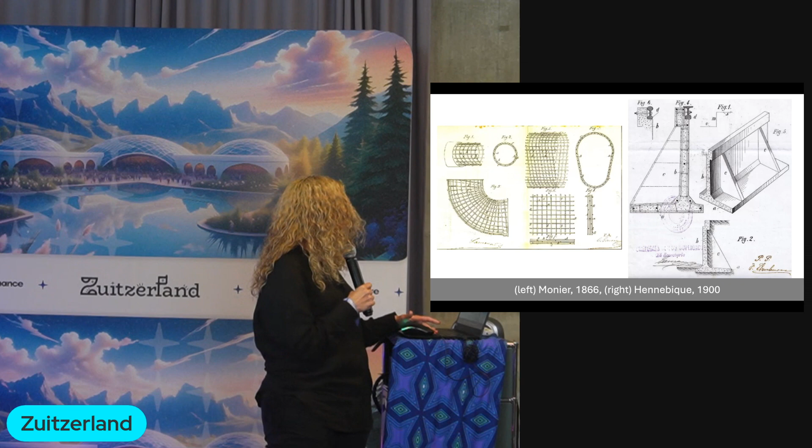And something very interesting for me as we work through this is when we find that the ways that we build right now in 2025 are based on patents that are coming from the 1900s. For example, reinforcement bars for concrete; this patent was filed in 1866. Or if we look at CLT, mass timber, all of what we talk about these days about timber, we can go to the 1920s when this was invented. So the idea of Circular Factory and what we're pursuing is: what will be the modern version of this? How will this look, and how can we make this more accessible, more customized, and more distributed?

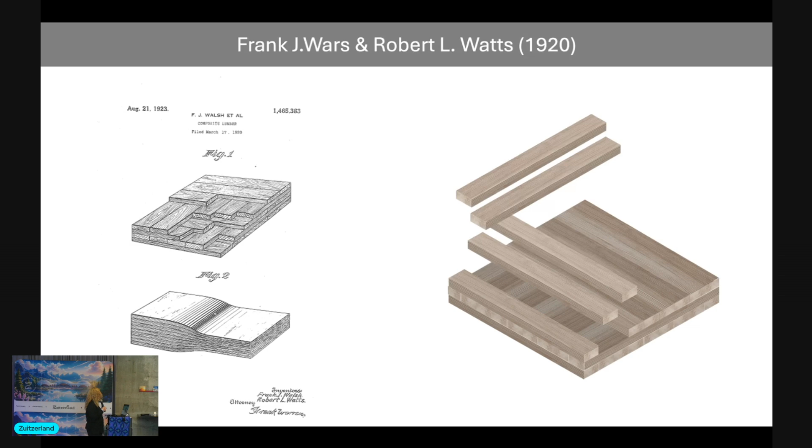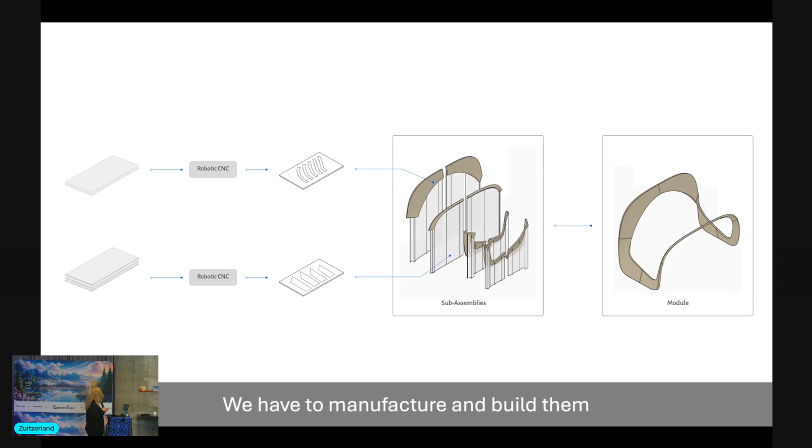And of course, we know that AI can give us a lot of good ideas. We love generating stuff with AI. However, at the end of the day, to be part of the built environment, we do have to build all of these structures and all of these geometries. So how do we manufacture and build these ideas, when we talk to groups and people who are really fascinated by forms and shapes that they don't normally see in the built environment? And how can we make this accessible, affordable, efficient, and also participatory for everyone involved? Those are the tenets of what we have been working on.

Why we use robots, and why we have been shaping Circular Factory on robots, is because they are really accessible machines. They are very cheap compared to other larger fabrication machines in the industry for traditional orthogonal construction, panelized construction, or mass timber. So we focus a lot on robotic arms. We know that there has been a lot of work since the early 2000s with Gramazio Kohler at the ETH and a lot of other universities and institutions really looking at robotic fabrication as an alternative.

And the other thing is that we know that the machines are very flexible. So whatever you can hold in your hand, whatever tool you can have, a robot arm can also hold in its hand. They can use the same chainsaw, bandsaw, gripper, pencil, marker, whatever you can think of.

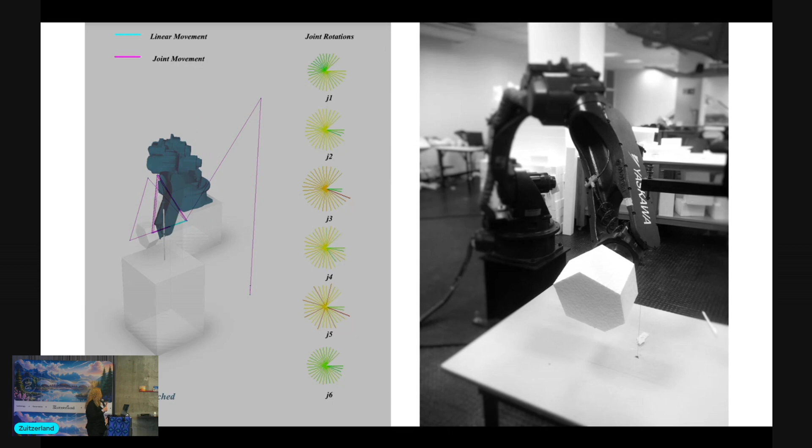And we kind of started to play with this and to see, okay, what are the different kinematics, the different solvers, the different ways that we need to program robotics, but also how can we build geometries that have a different language, but that also is reflective of how the robot works as opposed to how the human works. And also, how can these geometries be built in an efficient way?

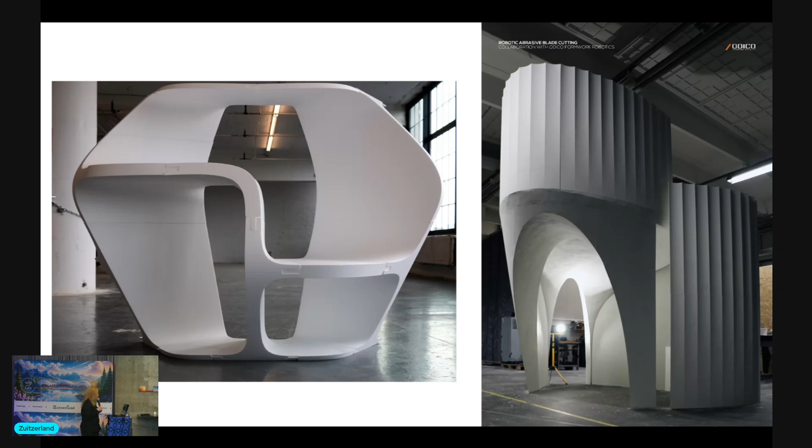So these are some experiments that we did at the DRL, at the AA, on a master studio I was leading with Shajay for 5 years, where really all the ornamentation is coming from the robot arm. And also, how can we mix a lot of these methods of construction with traditional methods of construction? So not making everything new, but also taking expertise from things that are very well established, that people know how to do, that people are comfortable doing, and just bringing that layer of innovation on top to make a difference. So that's the kind of things that really interest us.

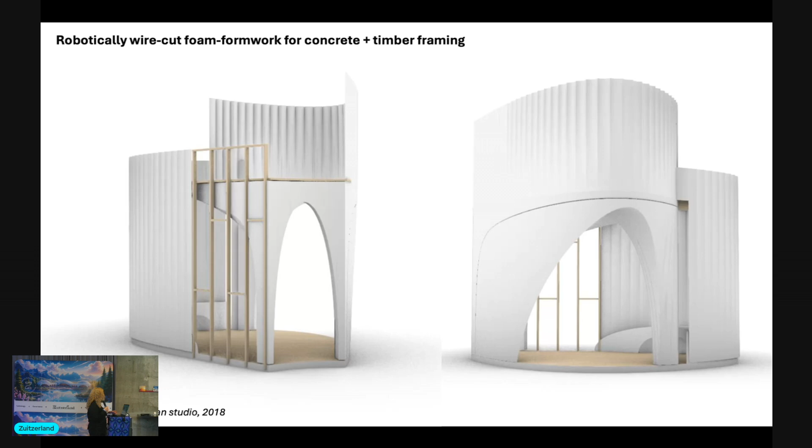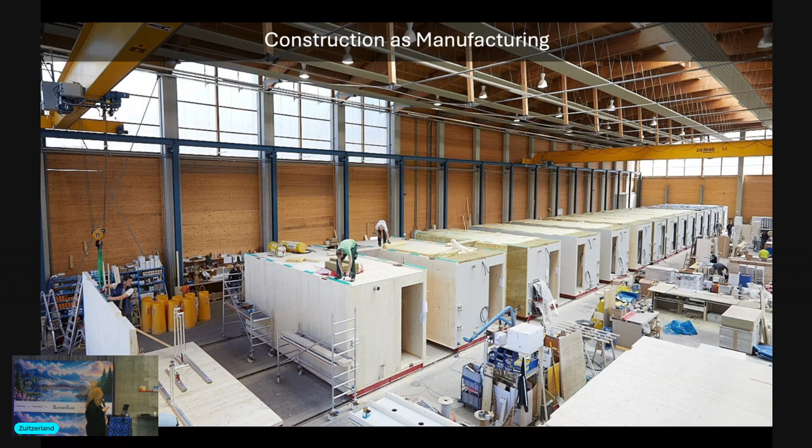And something that we know is design for manufacturing and assembly, the main precept of the industry, DFMA, came in the 1980s, when a lot of the on-site construction, a lot of the fabrication basically got moved into factories, into shops, and a lot of the built environment we see around us today is made of construction seen as manufacturing, which basically means that houses and buildings are produced off-site in a remote location in factories, and are then transported to the site where they are going to be deployed.

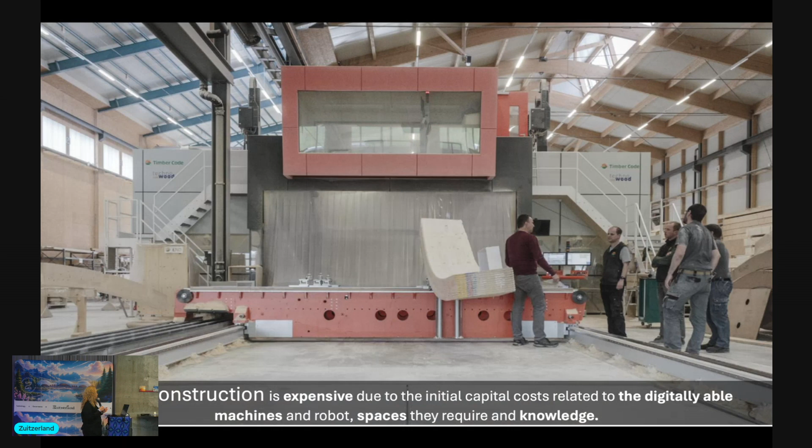What that means on the one hand is that we have a lot of repetition, a lot of standardization, as opposed to normal housing where you have your own personality or individuality. It also means that it is in the hands of very centralized and very few companies that can afford these very expensive machines, the larger spaces where these machines are positioned, and also the knowledge to operate these machines. So what we are trying to do is reduce the initial cost to use the machines, and also the knowledge and the learning curve, to enable more people to participate in this digital space of fabrication.

And also a lot of the work, especially as we will see with Prospera, but with cities, is how can we also get engaged with the small and medium companies that are around 98% of the contracting firms in the construction industry, as opposed to having it centralized in only big offices and big construction companies. So from DFMA, a concept from the 1980s, we are trying to move to this new precept of what we call design for robofacturing, DFR, which is flexible robotic cells that can robofacture high quality products using a single arm machine, simple machines that are cheaper and easier to use. So what we call human compatible digital fabrication.

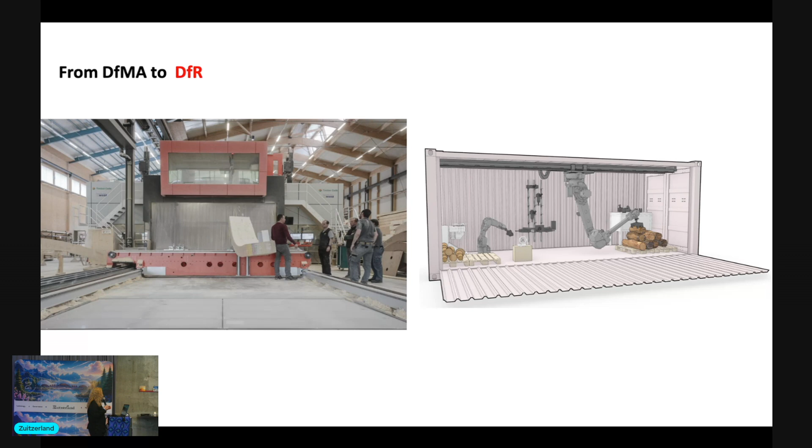So how can we move from a concept of design for manufacturing and assembly towards a concept of design for robofacturing? And some of the things are, okay, how can we move from these large, centralized machines to distributed microfactories that can be placed in remote locations, all over the world, and that are based on machines that are more flexible and more affordable. So this is what we're trying to do.

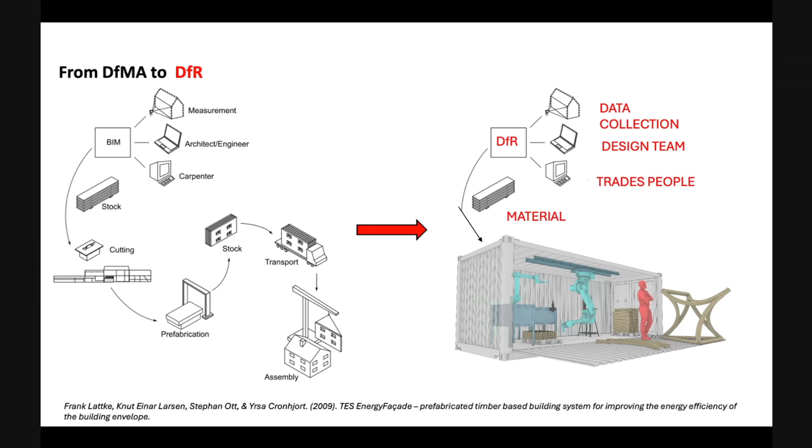And also, how can we get closer to the tradespeople, closer to the design team, closer to the developer, closer to the investors, in a way that all of these different trades and participants are engaged together within the same digital platform, and they can have transparency and visibility of the whole fabrication process. It's not only that you receive an invoice, receive an estimation, and then you have to pay that, but how can we make this very transparent to everyone involved?

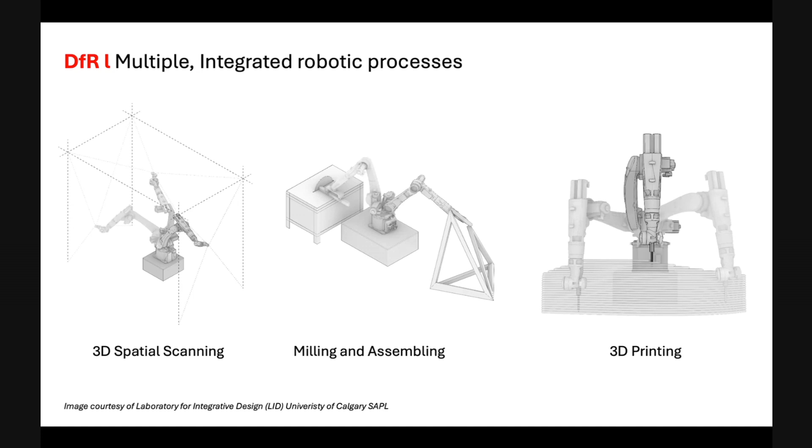And again, we use the robot for spatial scanning, milling, assembly, 3D printing. So we have a lot of different processes embedded in our machines in the microfactory. Pick and place, 3D printing. So these are some of the tools that we also use.

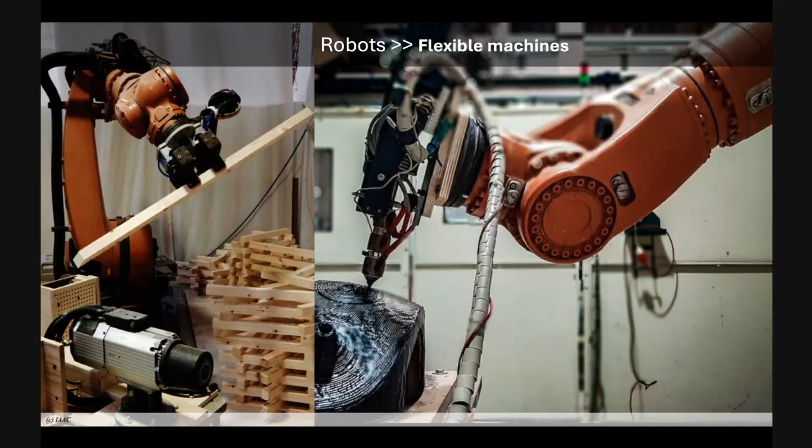And of course, something that we are also starting to see now after 2 years of operation is how it can start to benefit the local economy. Because as opposed to factory-made construction, all the materials that we source are local, in the case of Prospera from Honduras, but also all the local people, all the local trades that we are using, training and upskilling, are local to the community where the microfactory is based. So that is a very critical part of what we want to do.

And there are also additional or periphery industries that benefit. For example, we have a person that has a kitchen cooking for the workers. So construction really starts to bring benefits to a bigger ecosystem than what we expected.

And that has been something very interesting for us to see, how we now have additional industries serving our factory. Something that we are also looking at and are very engaged with is cyber-physical platforms. I think Shaya mentioned Jane Jacobs, and how the point of cities is to have this multiplicity of choice. So how can we engage the user, the buyer, in the decisions of the design that is being fabricated? So it's not only the architect and the designer, but people can also have a choice.

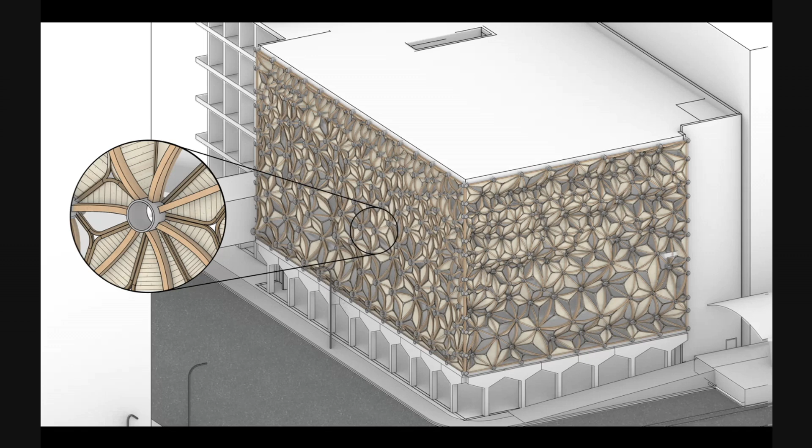And we have developed a platform. For example, this is a facade in Canada that we were designing where there are multiple options, everything is differentiated. It's a conversion from an office building into residential, so these used to be offices, now they are flats. In your flat you can decide what view you have, the facade, the transparency, the different opaqueness of the panels, so you can make many decisions. Whether you want more solar gains or less, but how can people actually understand this and be part of the design? So for that, we developed a game.

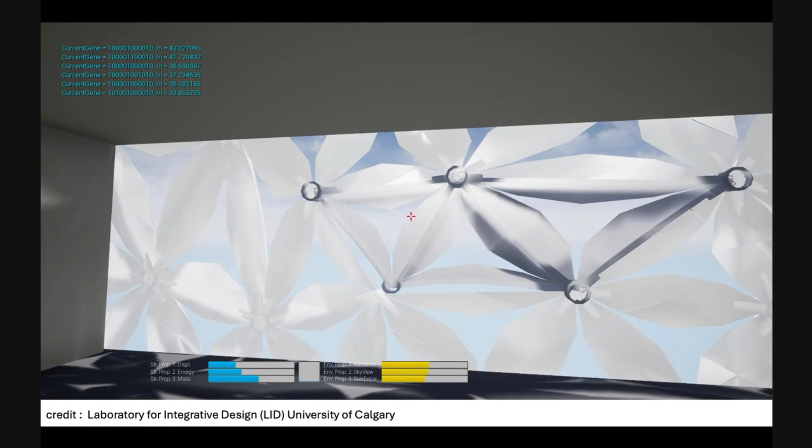It's in Unreal, where we are trying to give people feedback, so as they are selecting and choosing, we tell them: that will take more manufacturing time, more robotic time, that will have more thermal gains, what your thermal comfort is, but also solar gains, what your view is. The idea is to make a lot of these parameters accessible for a common user. So we grouped these into terms that make sense, like radiation, sky view, fabrication, and people can be selecting and moving, a little bit like when you go to a supermarket, you buy food, you can see the calories, carbs, proteins, etc.

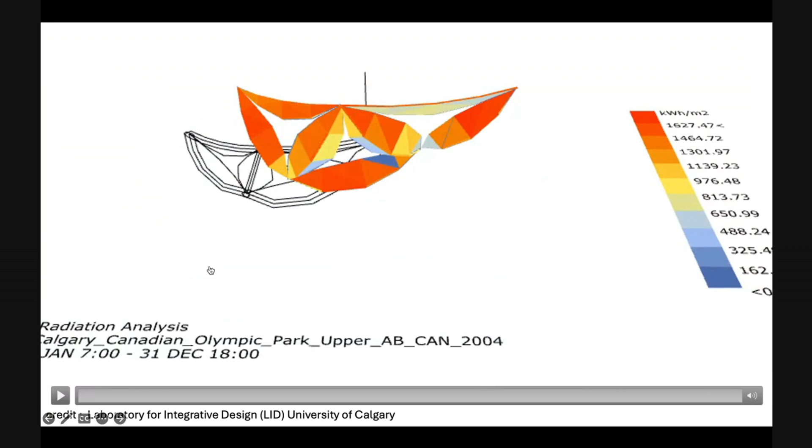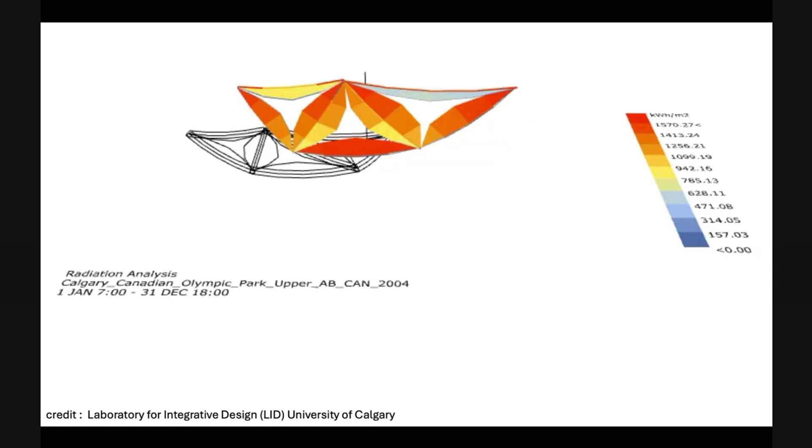Can you see the manufacturing time, the machine time, the electricity consumption that every single decision you make on the built environment has? And does that actually help you make decisions, or do people not really care at all? So that's part of the work we have been doing. Of course, in the background of the platform, we are running all of the simulations, for example thermal analysis. People don't see this, but also what is acceptable for construction, what is acceptable for the deformation of the curvature of the different glue laminations for the facade.

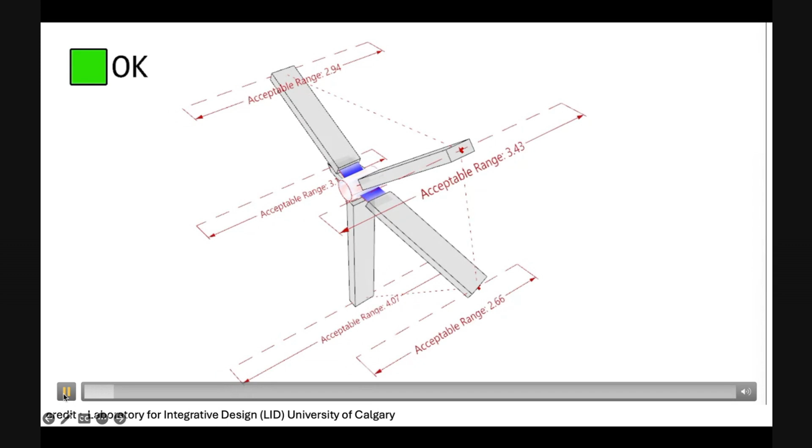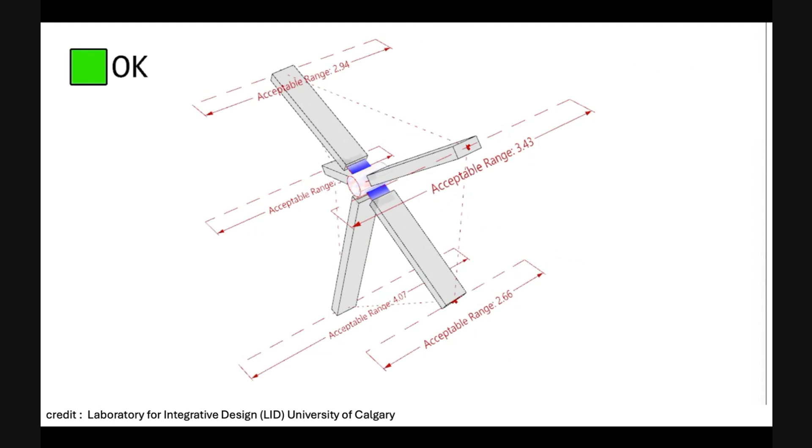So people are only allowed to pick between things that we know can be made, although they will have different costs and different implications. So within what is acceptable, they have an option to decide. This is ongoing research that we have been testing with expert users, like designers, and non-expert users, like developers, clients, or just people that will inhabit the building, giving them all of these options as feedback information for their decisions. And of course, when the whole aggregation comes, this starts to show what will happen there. So yeah, maybe this is not working.

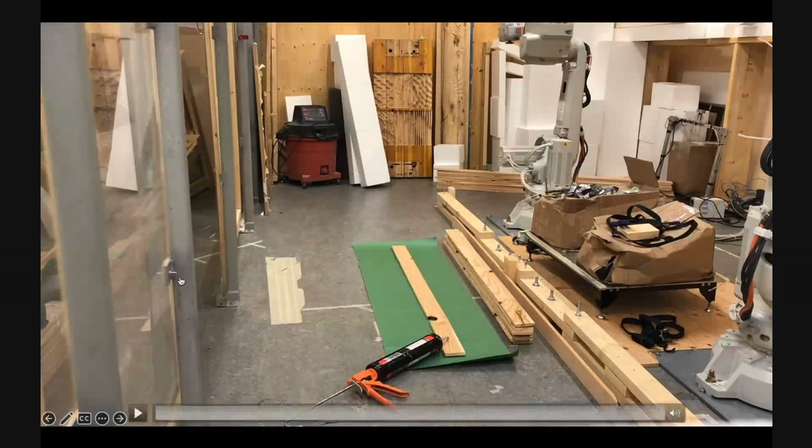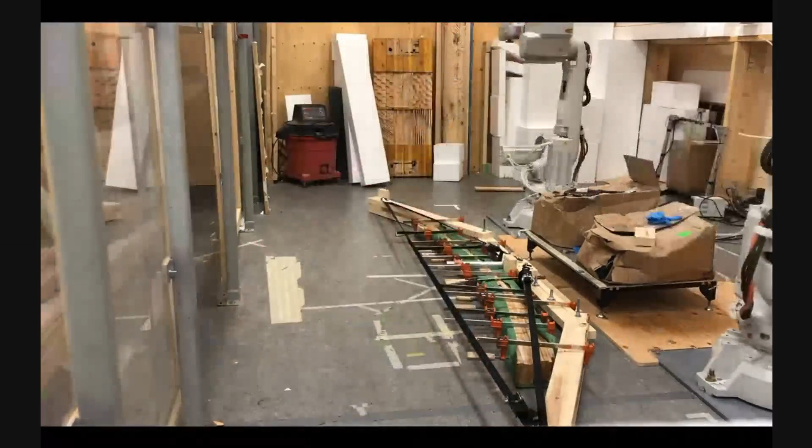And all of this data is also based on fabrication. At the same time we are using the robots, the fabrication system, to know what is the maximum deflection, what is allowed, what is not allowed, how long the robot takes to do it. Our robots are also running on generators, so we know the electricity consumption. So we are trying to capture as much data of every single step as possible, so that you can know exactly how much machine time, but also electricity consumption, your decision could have on how the components are produced.

And the robots are the same machine again, so it bends, it's also milling, it's also doing all of the mitering, all of the cutting. So a single machine with multiple processes embedded at the same time, trying to make them as flexible and customizable as possible for all of the different requirements that the clients, the developers, or the people using these buildings might have.

There's something funny.

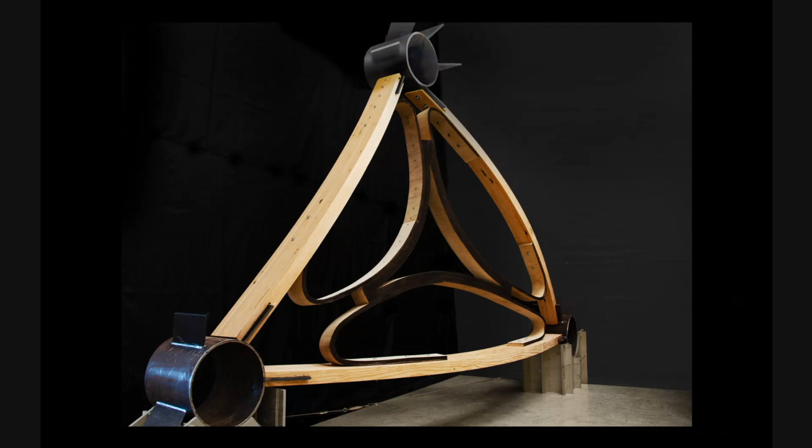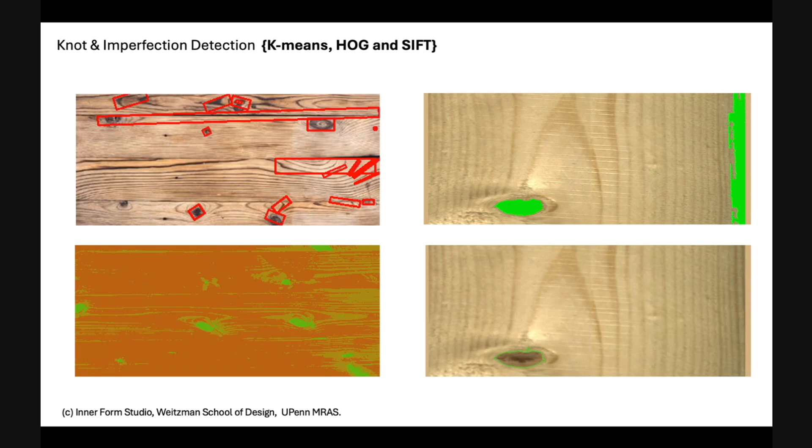And then this is, for example, one of the full-scale prototypes that we are building, another thing that we have built based on user decisions and feedback. And something that we are also using in the shop is machine learning as a way of understanding materials that are heterogeneous, like wood, for example timber, that has a lot of different characteristics, a lot of different natural processes, like knots and grain directions. So how can we detect all of these before we do our laminations, so we can have a more efficient use of the material?

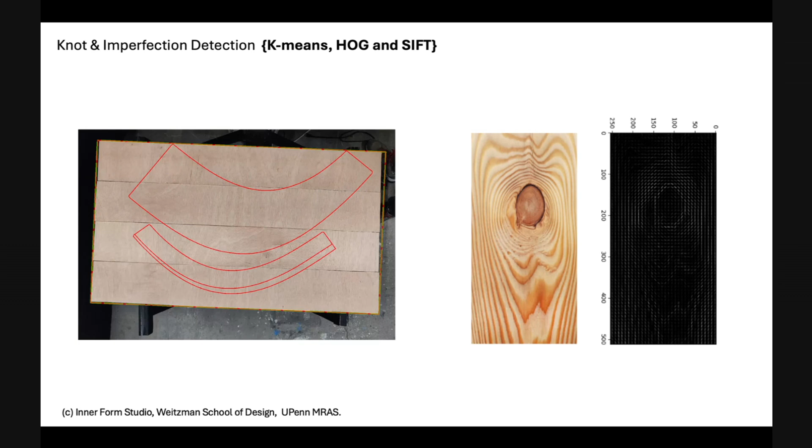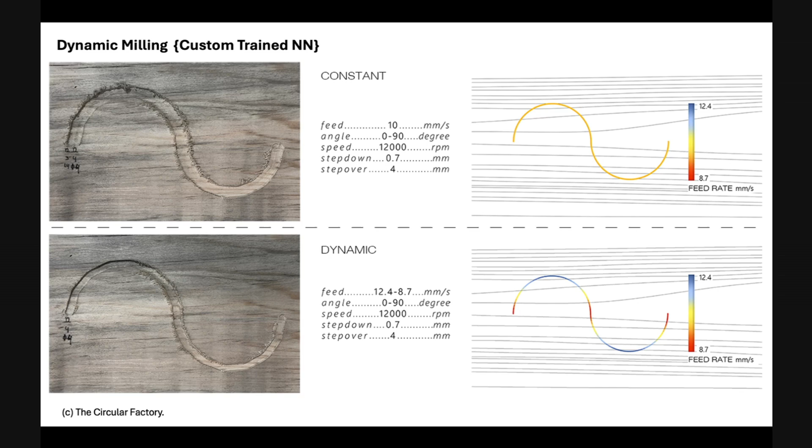And our workers at the shop, although they don't know any of this, when they are laying out the laminations, the pieces, they can get visual feedback of where to place them and how to place them, to avoid any imperfections or to make the process more efficient. So this is also something that we implement. And also dynamic milling: how can we change our speeds and feeds to get the best results as we go. So a lot of these are the inner workings of the platform and the research that we are doing to incorporate into the platform before doing the circular factory, and what we are offering as part of our cyber-physical platform.

And a lot of different wood also. So we also work on how you can have different combinations of wood, especially in a place like Honduras. They have timber, which is pine, the more normal construction material, but they also have walnut and mahogany, very precious woods. So can we have hybrids where we have the precious woods on the outside for water resistance, to make them less affected by termites and bugs, but keep the core lightweight? So we are also looking at a lot of these hybrid compositions to make the best use of the material available. They also have a lot of teak, a lot of really expensive and really nice wood, and we are really trying to make and promote these compositions.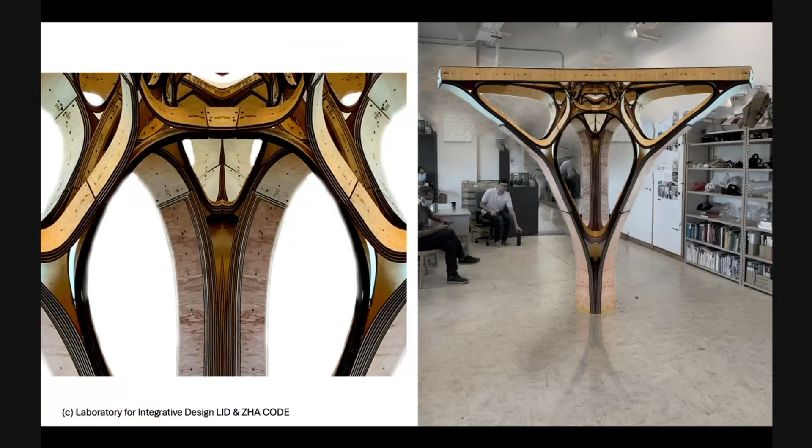And also the expression of the construction. So again, in this case with the laminations, if we have a lot of laminations, how can we make that very expressive in the final product? So we are trying to combine all of these into a single offering.

And also, as I mentioned before, we engage with local materials, and this is something that we try to do because we're upskilling people. We are really working on reskilling, on building local knowledge, and also on making people proud of what they are doing. And that's something very important when we engage with communities. When we arrive in a community, we want to become part of that community. It's a new city, but we need to use the local labor. We want them to get excited and to get better opportunities as they move on in life.

And one of the things is that it's different from Swiss wood. Wood from Honduras is not perfect. It's not really precise, right? It has a lot of imperfections. So we really need a very adaptable platform to deal with all of the twists, the crookedness, and all of the issues with the wood. So we really try to work toward that.

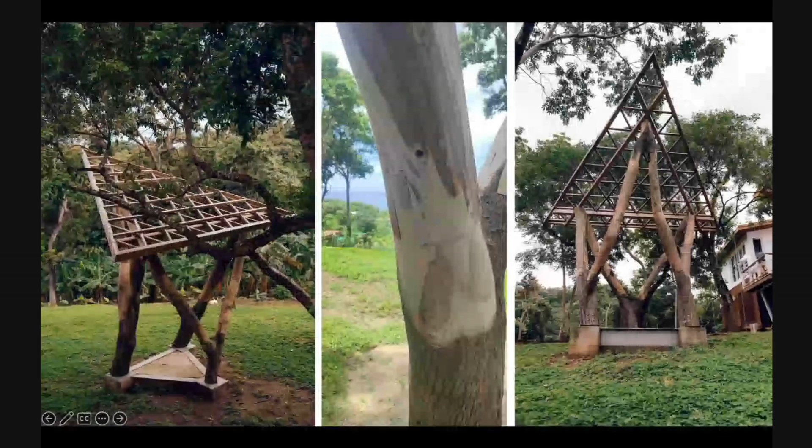And this is a project that we did, for example, in Roatán, using wood from trees that are left over, that they don't want, and by scanning them, getting all of the information about the interior of the wood, the knots, the composition, and then trying to use that to build something. So also showing them that there should not be leftovers, right? That we can use these pieces to build something interesting through our digital platform. This was done with the locals, and we built this little pavilion using leftover logs and dimensional lumber on the top.

So the main aim is how we can leverage technology to create sophisticated, dynamic, and customizable processes and have technology for social innovation.

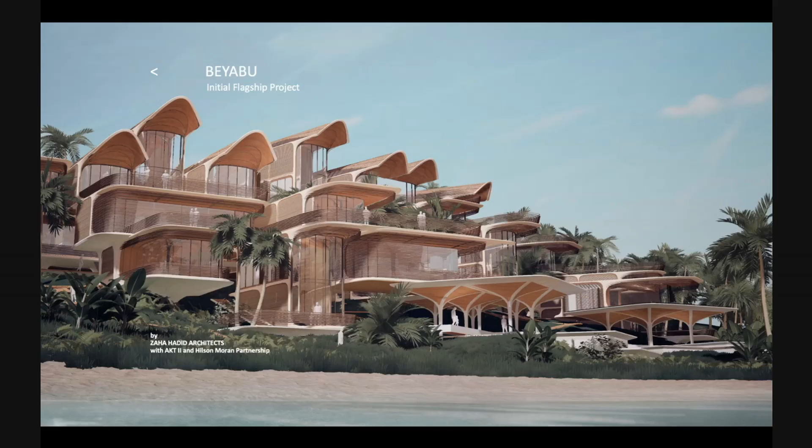So one of the first mandates, of course, Shai talked a little bit about Beyabu. This project by Zaha was a very ambitious project, and one of the main things was that it was really customizable. As you saw on the platform, people had tons of options that they could pick from and configure in different ways. So we had to design Circular Factory to be able to deal with all of these variations of very complex geometry and to fabricate all of these decisions made by the people playing the game.

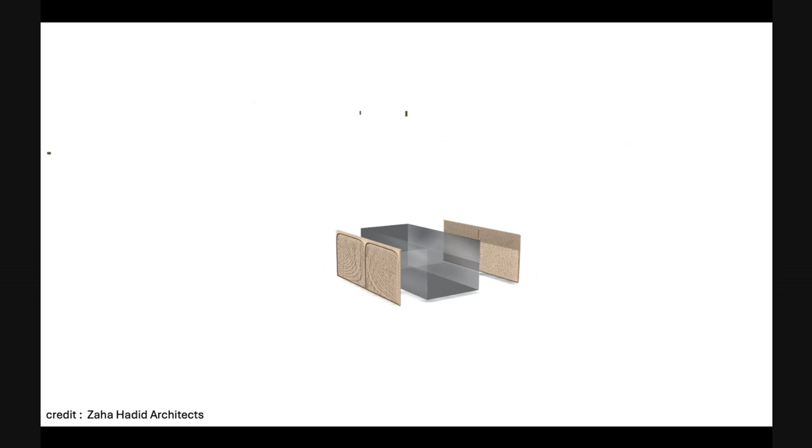And these are some of the kit-of-parts, the components that were there initially. So we have different balconies, different facade elements, a lot of different louvers, the palapa roof or the curved vaulted roof, the flat roof.

So there was really a very interesting repertoire of pieces and of different elements that we had to be able to fabricate, and that we know that if people pick them, it shouldn't be the case that they picked something and then it's like, well, sorry, that was a bad decision, right? We need to offer a possibility.

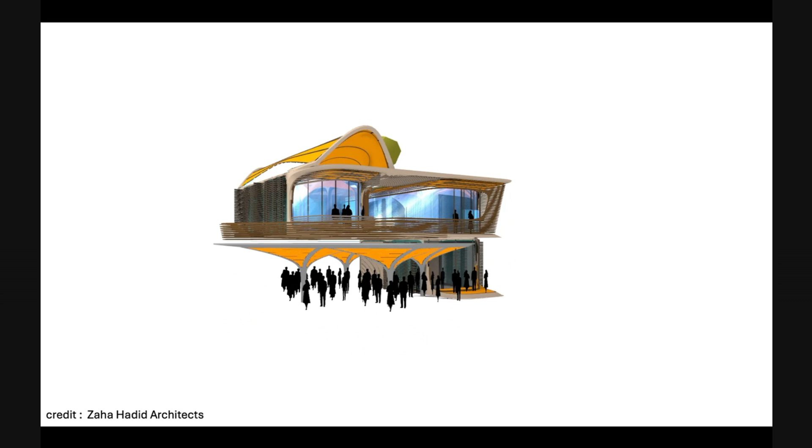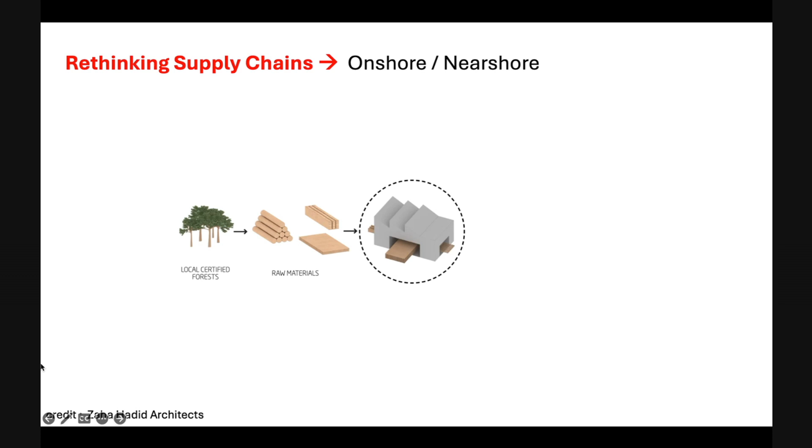So based on this kit of parts, we designed the Circular Factory with the idea of having a factory mainly geared towards supply chains, towards localized supply chains on the island, but also towards fabrication that is complex, that is curvature, that is highly ambitious architectural formations, and that everything is designed so that you can make all of these different modules. One of the main things is that the fabrication of the main module was made out of a lightweight construction, like a stick frame construction.

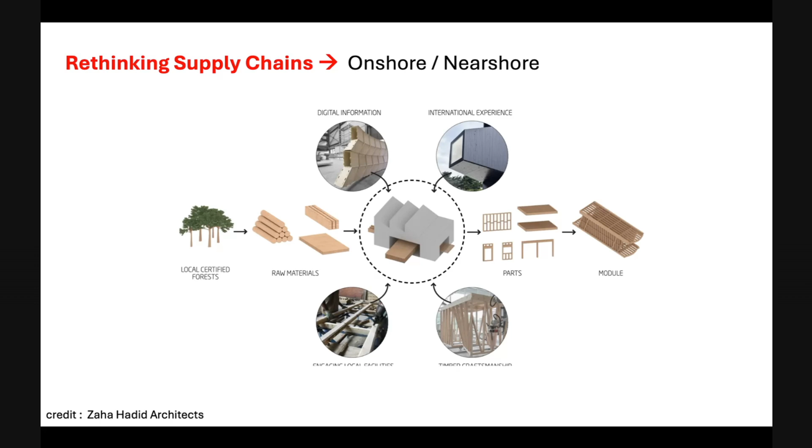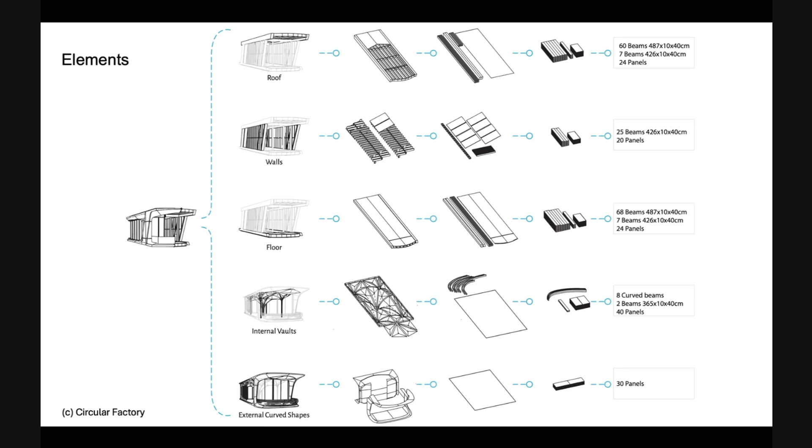So we started by making that hierarchical analysis of the different components of the building. And a lot of those components, for example, were very linear, very... could be done by the locals. So those ones we kind of left for the locals. We still quantify all of that to know what is the amount of material that is required. And then we kind of focus on a lot of the curvature of the most complex shapes. How can we fabricate them? Still by having a very good understanding of all the different elements.

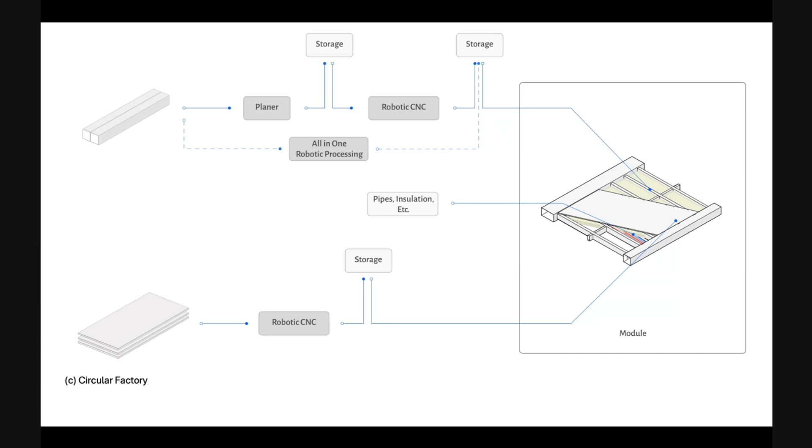And then the panels on the inside, they are fitted with pipes, insulation, all the pipes and all of the HVAC, all of that is inside each of the panels as they are fabricated. So each panel, of course, is not only using the robot, but is using a lot of different machines in the process, from the planer, jointers, going to storage, going to glue. So really using a range of machines that we need to have on the shop, and that we also need to have the correct process to know that we can have an efficient fabrication workflow.

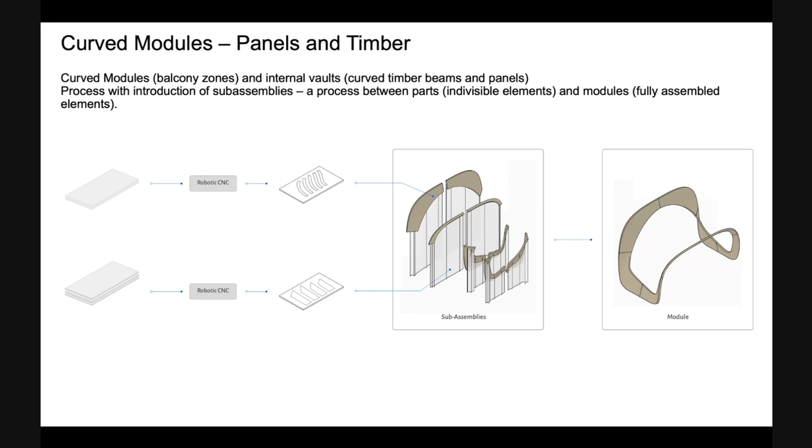And for the modules that are curved, they are more reliant on the robot, on the CNC, or on the different parts that have to be curved for them. So we can spend quite a bit of time analyzing and getting an inventory of all of these components to have clarity into the building sequences and processes. This is the same model that you saw before, but now rationalized.

Some of the things that also were important for us in the case of the circular factory is that they don't have any cranes, for example. They only have telehandlers. So the maximum weight that you can carry is 2.5 tons. So how can we ensure that there is no panel that will be heavier than that? So a lot of this is adapting to the local resources, because it's not only building things, but it's what wood is, what machines are there, what capabilities they have. We cannot just bring large cranes or something like this.

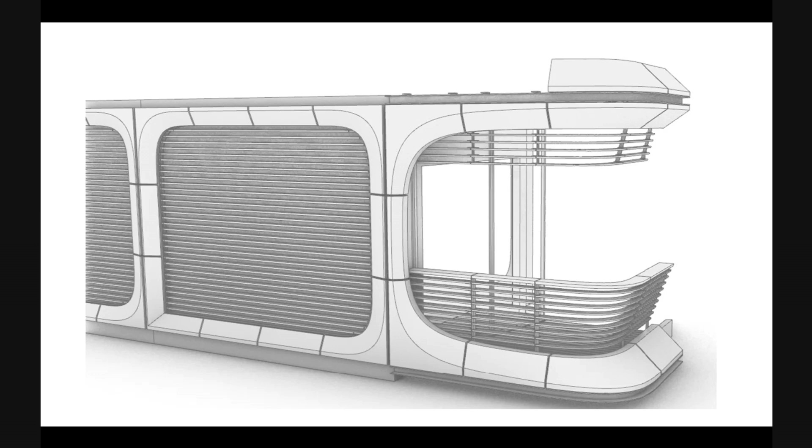It's just impossible. So these are some of the complexities that maybe we didn't see at the beginning, but as we started to develop the project and to really engage into how we're going to fabricate this, it became really, really critical into our distribution of elements and distribution of the different loads and of the different fabrication processes. So these are all the components into elements that we know are not heavier than 2.5 tons, can be lifted and carried on site.

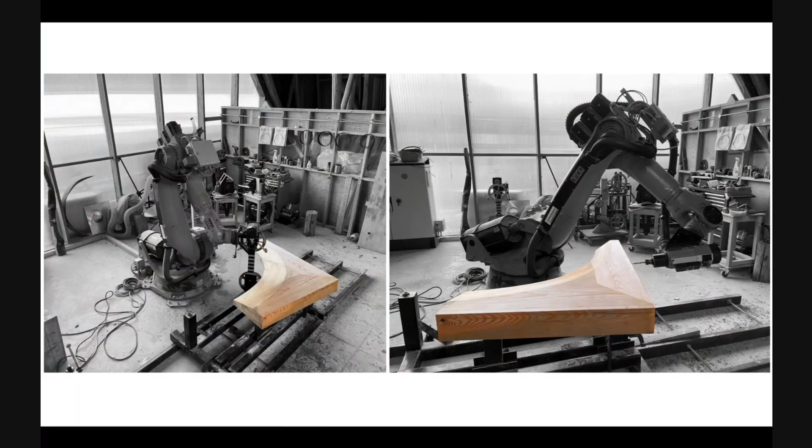This was the first test that we did for the fabrication of the components. So this was a test that we did in London, using the robots there at Hooke Park, before moving into Prospera and to building them. And then here again, you can see same robot, different tools, such as milling, then the bandsaw to create these corner elements, in this case, creating a cross-lamination.

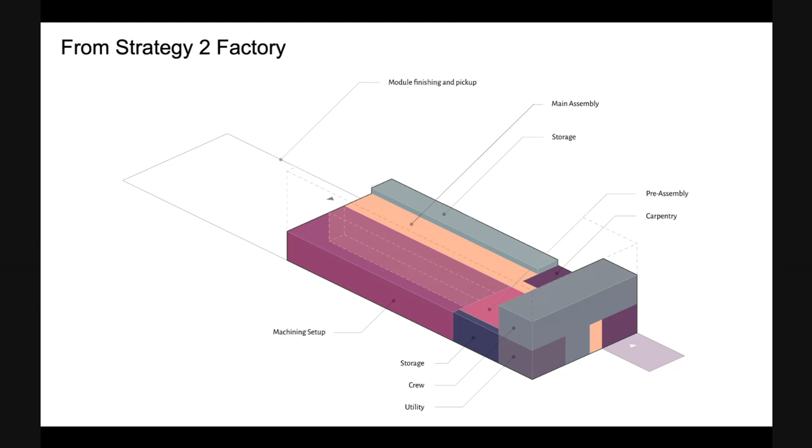After this, we started to also have like, how can we go from this mega factory to the micro factory that will be able to handle all of these processes? So there was a large part of research into what is the size of the module, how will it come into the shop, what are the different stages that it has to go through, and how will it then actually be able to be picked up, moved away, be stored, and be assembled on site without creating any bottlenecks anywhere in the process.

And this is more or less the composition of the factory. It's a very small factory in terms of footprint, and all the production is inside there, so you can see the robot arms on the track, 2 big robots. We also have planer, jointers, CNC machines, also a storage space, gluing space, and a painting, finishing room.

So it's around 500 square meters, but not all of that is ours. We only have like 300 of those, and that's where we have everything. As I mentioned before, we also have the computer vision there to be able to detect where the timber is, what are the variations, how does it work, and all of the simulation files adapt to the actual realities of the material that we find in Honduras. So what are the different timber 4x4s or timber lams that we get there, calibration.

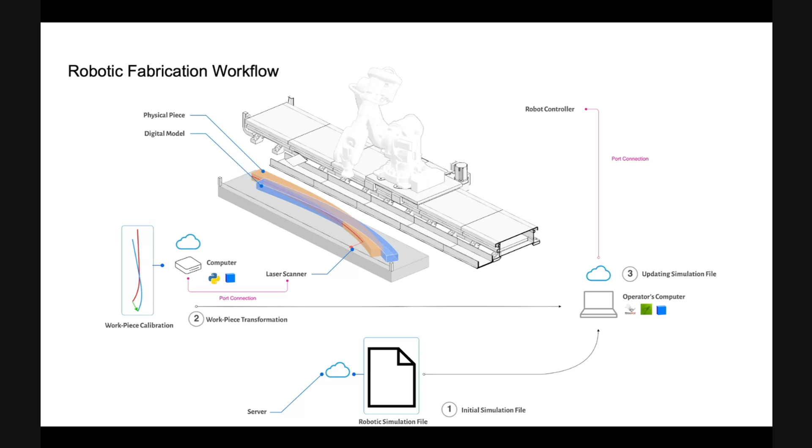And then the idea of the flexibility was that the setup is enabled ideally to have collaborative processing, individual processing, panels, large beams, and also small beams, and the more bulk parts of the houses. So all of this was considered on the setup.

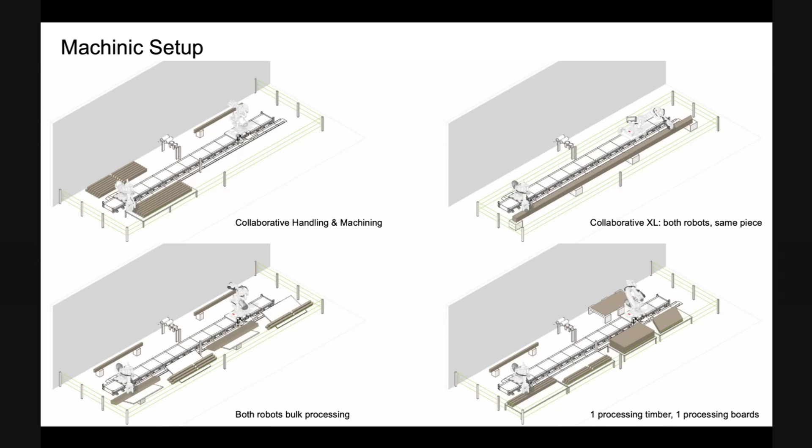And as I mentioned before, one of the main things that we wanted to have is a very transparent workflow where the design team can have access to our platform, the same as the assembly team, the fabrication team, which are our machines and workers, and also all the management where we are looking at logistics, cost, time, data analysis, and also the developers. So all of this has been connected and integrated into a single digital platform that then also talks to all the machines, and we have tablets, for example.

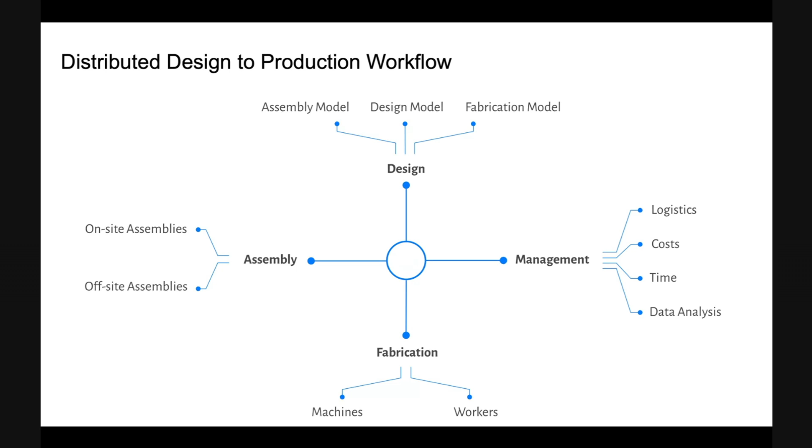We had a tablet at each station where the workers can log in, can see, can download the code, can work, and then can feedback whether a part has been processed, is not processed, or has an error, or if they had any difficulty. So all of this we can be logging.

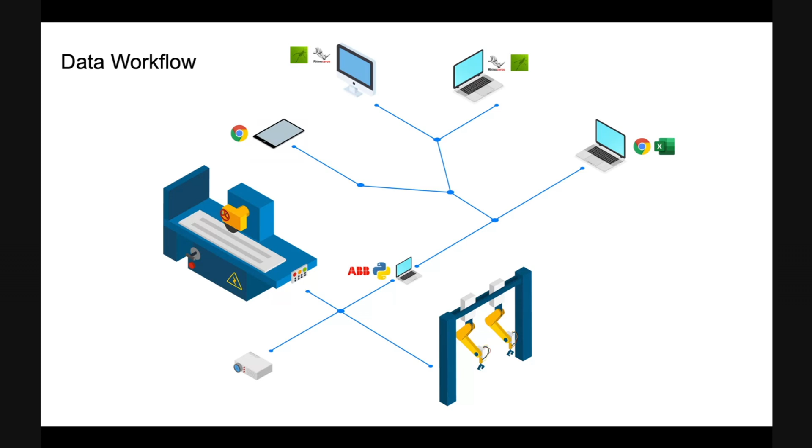At this stage, we have done three different projects in Circular Factory. We are still collecting data on humans, on how they use it, because unfortunately there is not a lot of data on human processes. And even machine process data is very proprietary. So we are trying to collect more data to really understand how to make this more efficient, or actually improve our time analysis and time cost projections. So all of this is connected through the platform. Everything on the shop is also connected to the same digital platform.

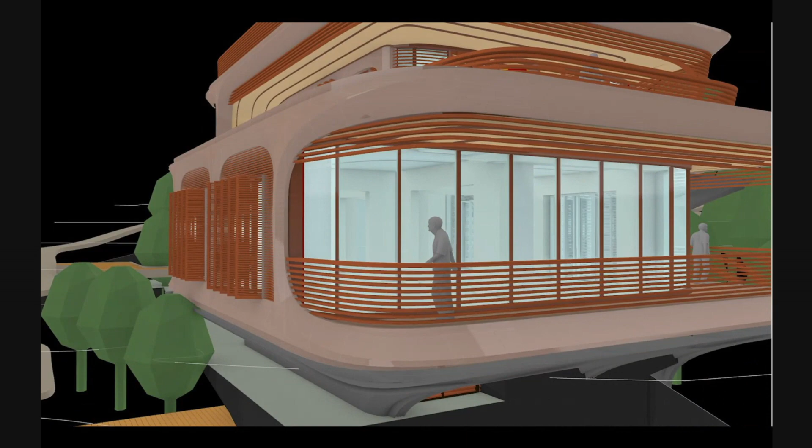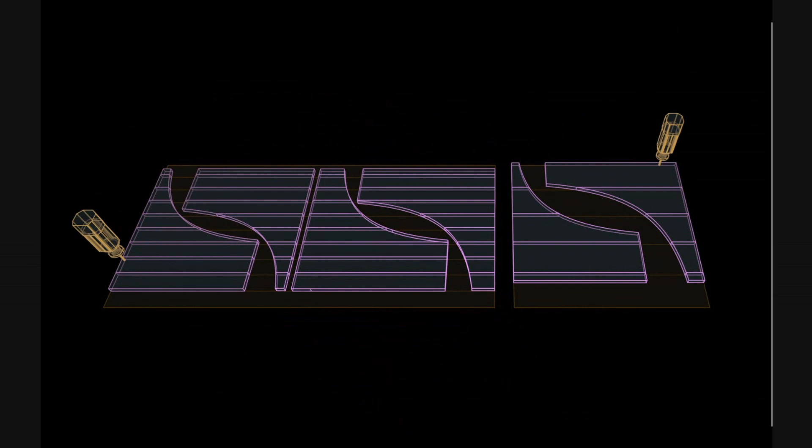Then all of this gets assembled on the shop. So this is when the workers come to the shop. They will see the different number of panels and components that they need. Then this is the CNC process, 3-axis CNC milling for the different laminations. After that they get to the gluing station, where they are all glued together, assembled into a full piece. Then it goes into the robot station, where finally they get milled into their final configuration.

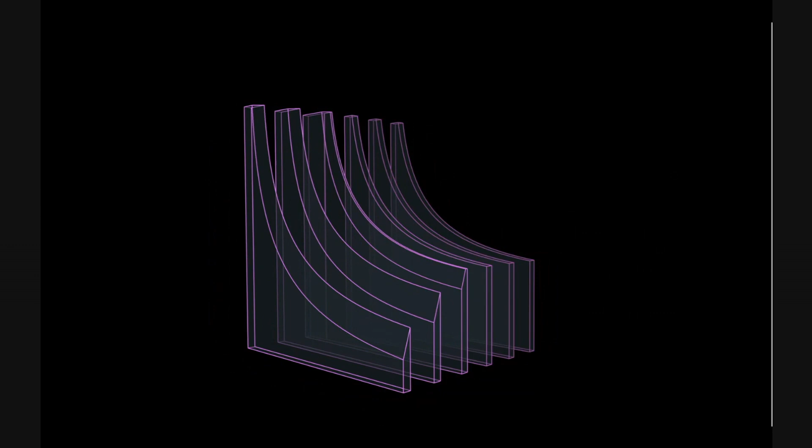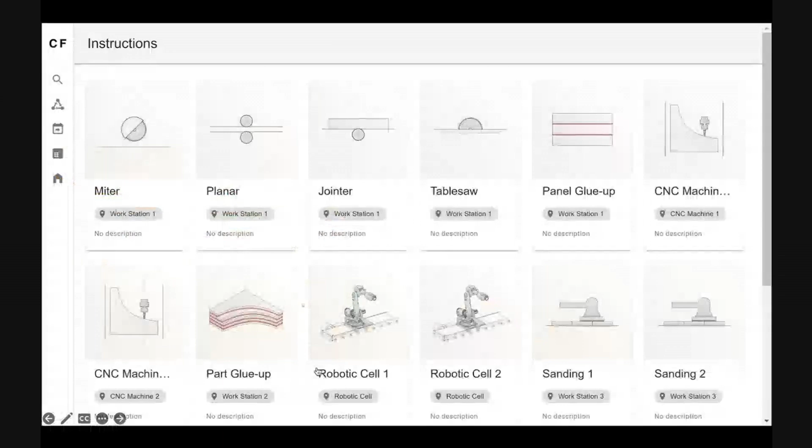And for every single piece, we have the same workflow, where everything is step-by-step analyzed, simulated, and then uploaded into the platform. And then from there, they can download, and they can have access to the different steps. At the same time, you have all the instructions. So this is also our instruction piece, where we have the robot cells, the planers, the jointers, the gluing stations, the storage stations, the painting stations.

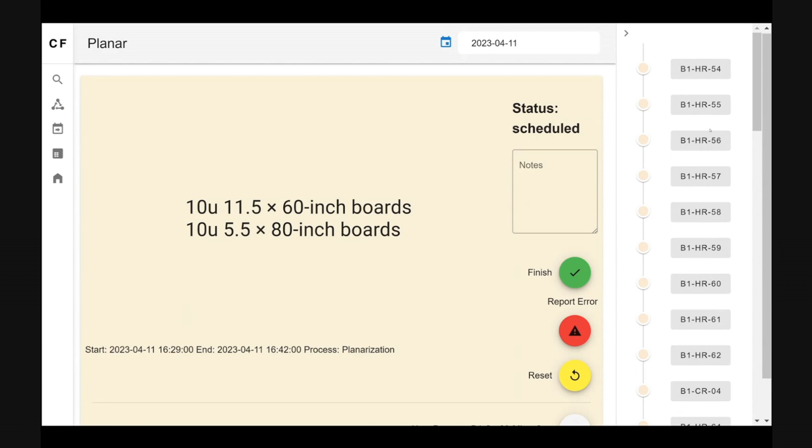And then here you can access all of the components, so the architects can have access to these, but also the developer has access, the other contractors have access, so they can see the different pieces, where in the process they are, when they are going to be fabricated, if they are done or not. And we really want to have this not as a black box, but as something that people can query and get information back.

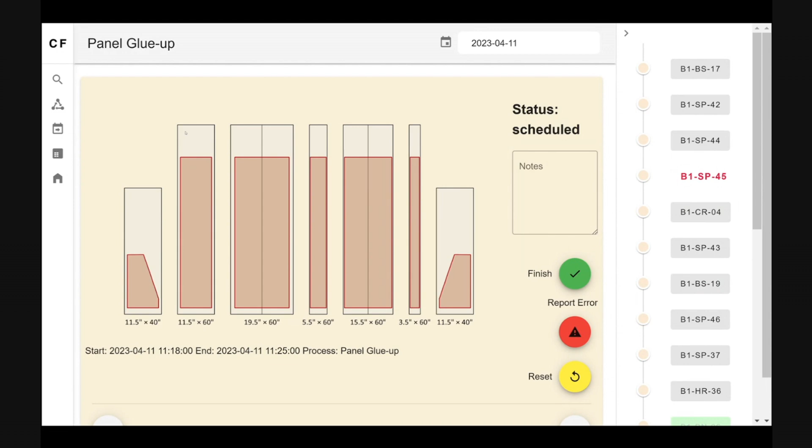Also, they can query them by unit, so they can see by the different units what the piece is: a corner piece, a balustrade, a bull nose, a flat, so they can also query them based on their position on the building.

These are the different units that exist on the RBU project. We have this for every project that we have done also, but it's the same platform, it works the same way. And this is, for example, if you want to also see the bill of materials, the machining time that it will take, so you can also access the identity of those pieces.

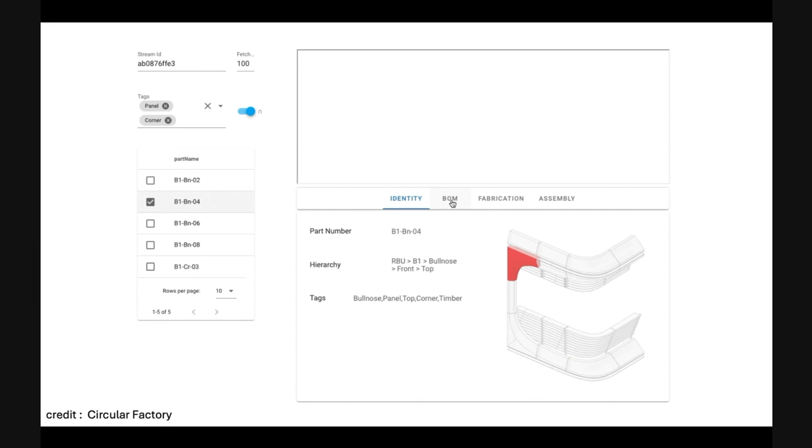Here you see where they are located on the building, on your assembly, and have access to the bill of materials, the wood pieces, adhesive, brackets, screws, dowels, as much as we can, and then what are the different steps on the fabrication that this piece will require. So it's not like a black box that suddenly you get a piece and no one knows what happened.

We can here see if it's in progress, whether it's finished, whether there was an error on the piece, and the workers on the shop can download the files if required for CNC or for robot files. If not, they can only see and visualize what they need to do.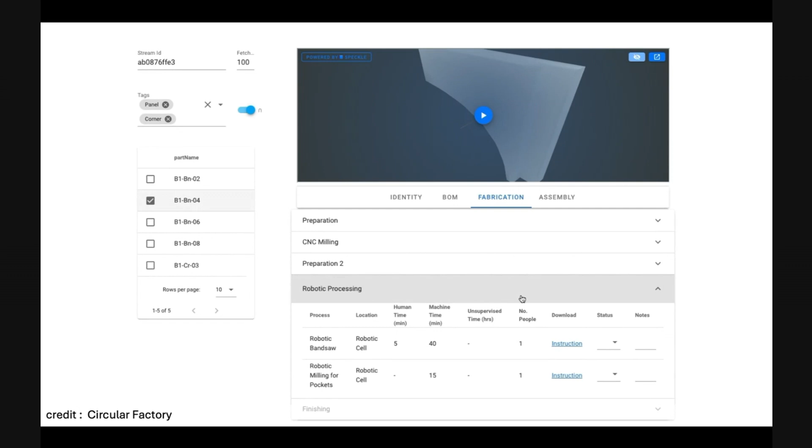And here, these are our estimates. Machine time is very precise. Human time is not so precise. We are working on collecting more data to make that a lot more precise. It's just because some people are better, some people are worse, some people are a disaster.

So human time is something that we really need to work with, especially when you have unskilled labor or people that are just upskilling and training, and it's something that we are working on improving. These estimates are based on our own work, so that means it changes a lot when people don't know what they are doing.

And then here, if you go to the piece, you can see fabrication progress, for example, how much longer this piece will require. In this case, 72% is done, so maybe it already has been cut, glued, it's in storage, it's only missing the final robot process.

And you can see when that is scheduled to be done, and you can also see, for example, in this case, the glue up, there was an error, what happened there. And then it also gets dynamically rescheduled to be done at a different time.

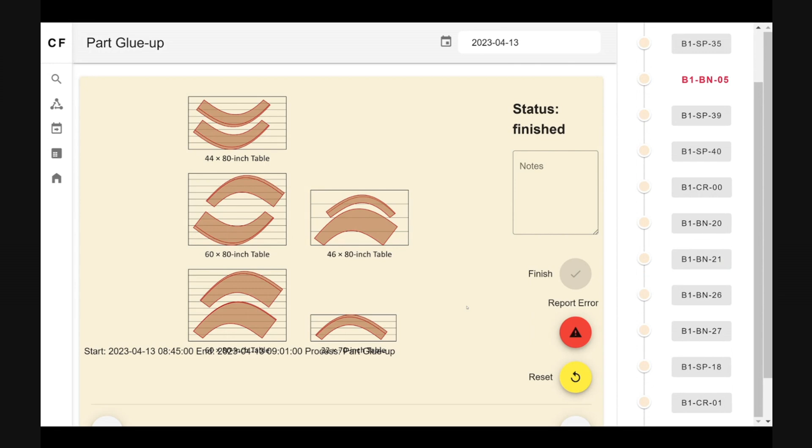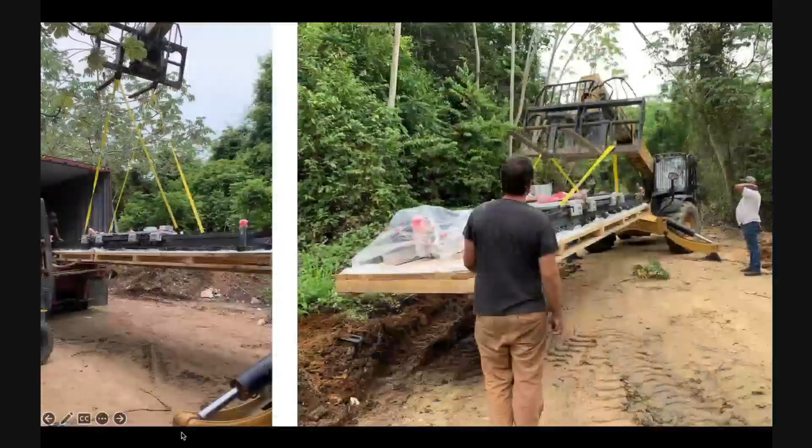It is a very interesting ecosystem where you really are in an area where this is really weird. But we were having all of our machines delivered on site. This was 2023, I think around May of 2023; we spent from 2020 to 2023 to get to this stage.

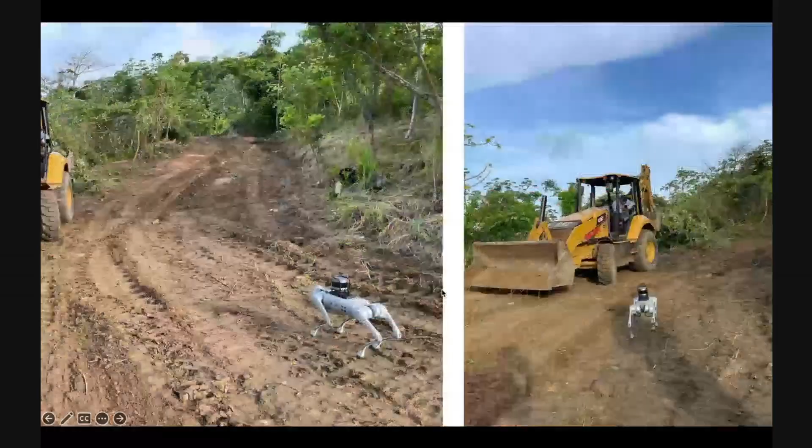And so we also have a robot dog that we use for scanning the site, so it allows us to get a lot of data of the site with a LiDAR scanner, of the composition, so it allows us to rectify a lot of the levels. So this is the road into Prospera.

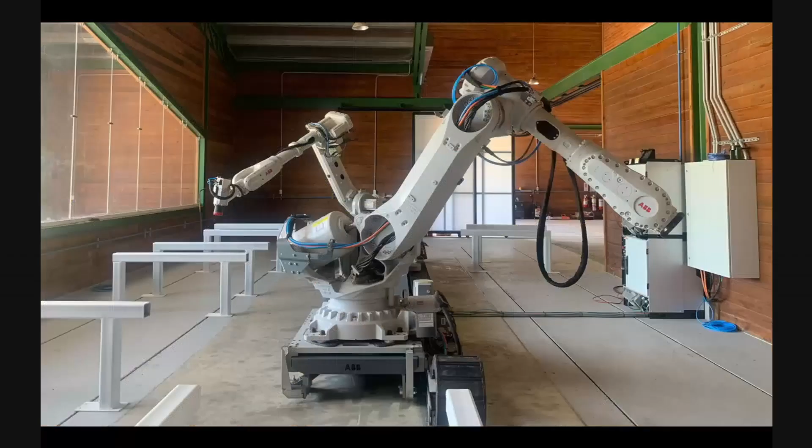And then this is the final configuration of the shop. You can see we have the 2 large robot arms there. And then we also have the different CNC machines, the different stations in our configuration for the Beyabu project, but also for some of the other projects: the jointer, planer, table saw, the panel saw, and all of them there.

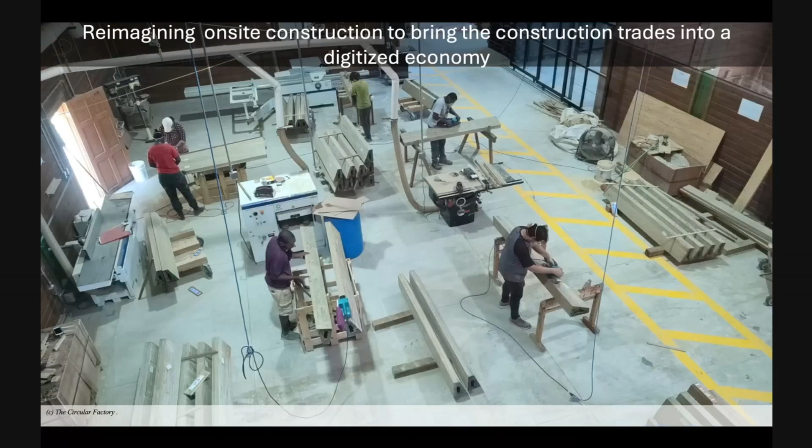And then this is, for example, louvers that we did for a tower. Same platform, but it can also dynamically adapt; this is the Duna tower. I don't know if you went to the Duna tower. These are the louvers for the Duna. We built all of that inside the shop. These are the different stations where we have the people working on those louvers.

And this is from 2 years ago, for the Venice Biennale 2023. We built a balcony, a prototype of the Beyabu project. So this is the build-up of that part. These are the curved areas, all using the same digitally informed platform.

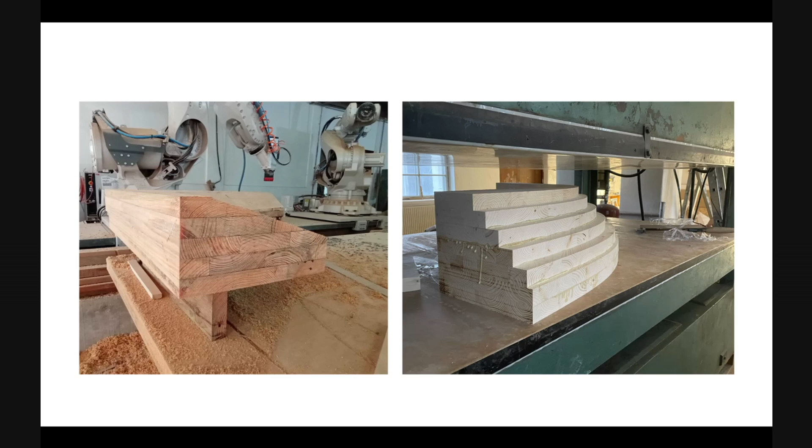And that is in an exhibition right now, in London, at the Zaha Hadid office. That's the balcony with the balustrade and all of the different steps of the process for one of the Beyabu units.

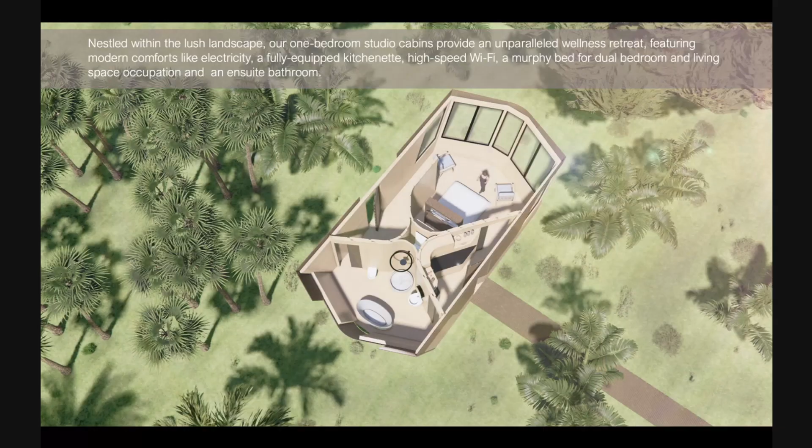We are also building other projects. So this is, for example, glamping cabins that we are currently doing. The first one is already finished. Again, trying to really look at these different shapes or different geometries that could be amenable for being in nature, that could be holistically integrated into the built environment, that could also give us that sense of cocoon, of being there.

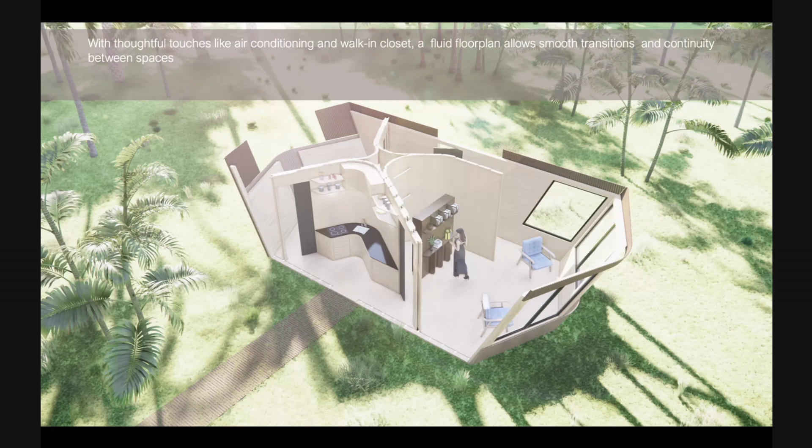So this is a 1-bedroom unit currently. You have a kitchen, a fully en suite bathroom, and the bedroom, and then a study, like a working area. And so these ones are being deployed near the golf club, and these are more for events when they have people coming in.

So this is again the working process. These are all the interiors of the cabin, exterior with the different louvers, and again we have the robots working on them. This is all transported through all the roads that you see there. So this is also a bit of a challenging process, but they are now being deployed. They are all prefabricated on panels. All the panels are coming out of the shop, going directly into the golf club near verandas, and they are being assembled on site to deploy the cabins.

So it's a bit of a combination between very digitally advanced techniques and more the craft and the knowledge where we are trying to upskill people. This is one of the guys who has been working for us for 2 years now. Now he's using the robots, for example. He's a total local guy from Crawfish. So we are really trying to bring this also to an aspect of social innovation.

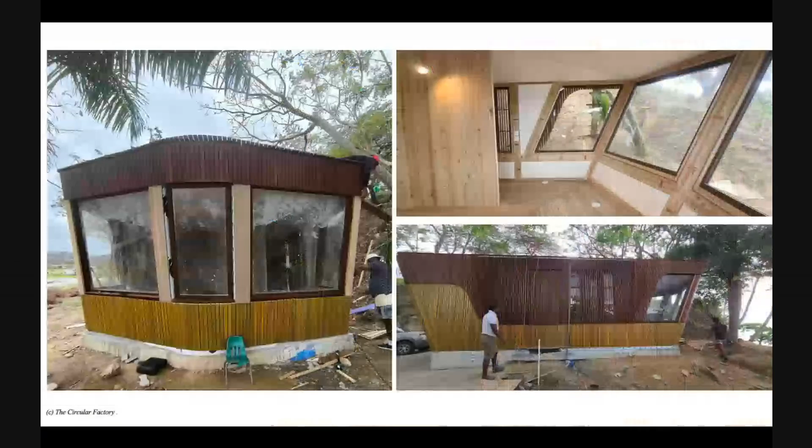And this is the cabin, so these are some of the views. It's unfinished, it's still missing some paint, but those are some views of the bedroom and the area and some of the sidings.

So basically the main idea is to have decentralized, distributed, democratic digital fabrication through the engagement with flexible and adaptable microfactories, software that enables stakeholder participation where designers, contractors, everyone can have access to see how things are being fabricated, in which stage of the process they are, and also micro-credentialing, upskilling, training local communities, and really engaging with them. So those are the main tenets of what we're doing and what we believe is valuable in microfactories for construction.

Hello. As a business model, for sustainability in the long run, how is the whole project of the circular factory going? Because I understand that the demand for the services comes from the real estate projects in Prospera. So is that the long-term vision, and how is it working until now?

No, so actually that's not the vision. The vision is to really be able to export some of them. For example, for the cabins, we do have clients in other islands that are interested in that. So really bring digital fabrication to the Caribbean. Currently, the demand is led by Prospera projects, but we are expanding into exporting them to Colombia potentially. We are also talking to people in Costa Rica and other places.

So the idea is to export the finished product, but the main thing is eventually we want to not be in Circular Factory. I mean, we want the factory to transition into being operated by locals, and then we go and set up a different microfactory. So our model is not so much creating the finished product, but creating the microfactory, enabling it, and then transitioning out of that so it's operated by locals to produce whatever they want, right? So we have louvers, we have done furniture, we have done the cabins, so having this repertoire that enables them to have different capabilities.

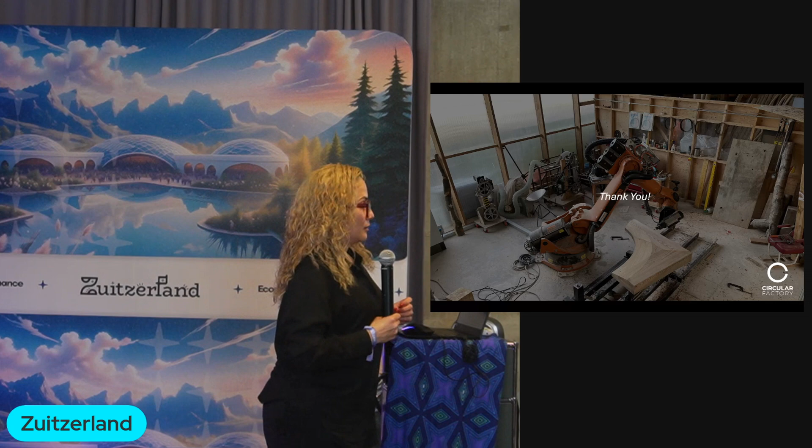One question I have is, I'm curious, what are the biggest roadblocks that you've found so far to the idea and the concept? Yeah, I think that, of course, the bringing of the machines. Some of the roadblocks are the supply chains. Supply chains, when you're in a remote location, are complex, right? So we need to be super organized. Everything has to be very planned in advance. Even sandpaper takes two weeks to get, right?

So you cannot really have a system that operates on demand or a just-in-time system. You cannot have that kind of operation. So supply chains are a problem. And also, of course, some of the situations with the government have created a bit of friction. But in general, I think, the action of upskilling and training people, because it's not easy. It's getting the sophisticated technology for them to learn and be able to use. So that has been an issue.

I think we were lucky that we got all the machines and all of our setup when there wasn't any friction with the government. So that was really good for us. But I think a lot of that is related to operating in remote locations. So it's supply chains, machine availability, and skill availability.

So when you're getting freight coming in from boats, do they have to clear customs in mainland Honduras first, or can you order things from abroad or by plane? Yeah, it depends where they come from. Most of our stuff is coming from the US, so they clear customs in Roatán, and they come directly from Miami. So we bring most of the stuff from Miami. All the lumber is local, coming from mainland Honduras.